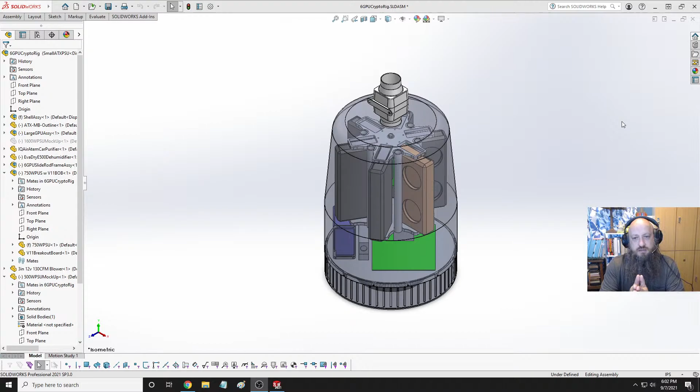Looking to get some things fixed that we noticed. And I'm going to look at where I picked up the information for these rods, because they're just so huge. They're so freaking huge. I don't like them. So I think I'm going to, because I believe I can go with probably 1/4 inch solid steel rods, and that'd make it a lot better.

Plus, we're going to modify this to enclose the round so that it makes sense. And then the next part will be to definitely double check some clearances as well. And hopefully get the rest of the brackets that I'm going to need for some of these things. I know a pretty easy one to do will be the one to mount the exhaust fan.

And let me make sure chat should be available. I don't see any. What the heck is going on here? Oh well.

Anyway, so that's the goal for tonight. Try and get as much of this finalized as possible. I know we definitely need to get the motherboard spacing, or at least the hole requirements for the various motherboards that could be put in here.

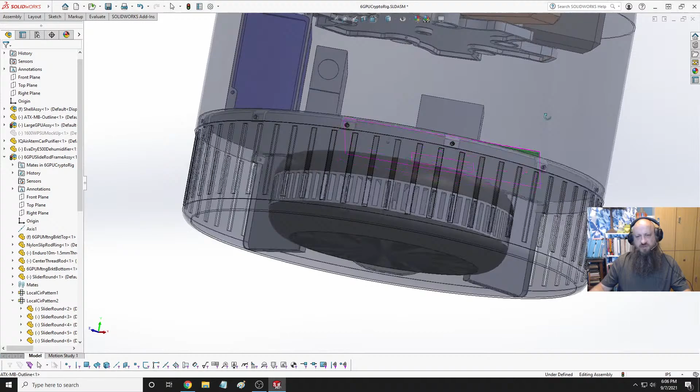The other thing I've considered was taking out the adjustment factor, because that's just adding a lot of complexity to the project. That's really not necessary. It's kind of like a cool thing, but I guess I could leave it in there. I still have to address the issue, if I am going to do it, of how this is going to mount so that everything moves up and down like it's supposed to. Which is going to be different.

Why is my chat not showing up? Okay, there it is. I actually have it popped out so I can keep track. Yeah, that's better. I like that a little bit better. That way I can keep all my stuff on monitors, and I can keep track of chat and not miss something anybody says.

So, alright, let's look at these slider rods. Bring this over. And honestly, I can do whatever size I want. You know, I may just do that. Because it'd be pretty easy to get a hold of a round of like 1/2 inch or 1/4 inch stainless or even aluminum if I chose to do it that way. It'd be just a custom, and then I can adjust the slider brackets to match what I need. So maybe we'll just do that.

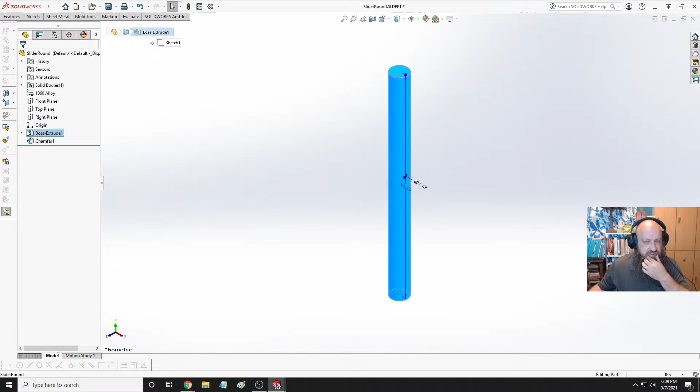We'll modify this a little bit to make it something that makes sense, because these are just huge. I'm not a big fan of how big they turned out, so we don't need this, so we'll just go ahead and modify this. Yes, go away. Yeah, that's over an inch. That's just ridiculously large. And since I have 6 of them, I don't need them to be that big. So let's go with a 1/4 inch diameter. You know what? I say that and then I want to change my mind. We'll go 3/8.

And we have that as 1060 alloy. I think that is the... Yeah, that's an aluminum alloy, so that's fine. And then we will have it chamfered top and bottom. So save that, and then we will make sure to grab, whoops, maybe. Will it let me grab it? Yes, it will. Let's open that up.

Let's get rid of that. That'll cause an error on the... well, maybe not. Okay. Edit the sketch on that bad boy. And we'll make this, let's see, 375. I'm going to do 0.390 for that. And 0.39 plus 0.5. That's pretty thick. I don't think it needs to be that thick. 0.390 plus 0.375. How about that? Yeah, that looks a little bit more balanced.

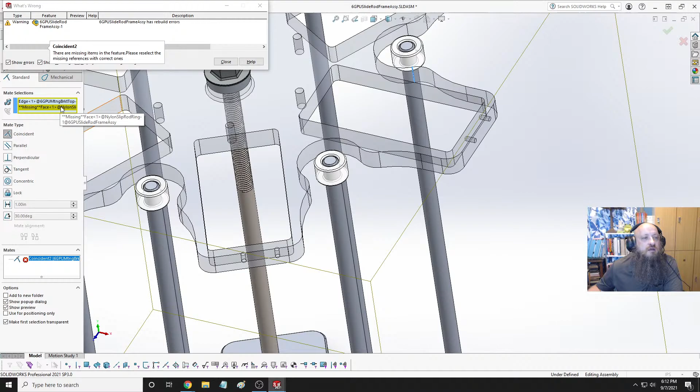Okay, because I had the flat tied to that tangent point. That's why it was doing that. Okay. Right now they'll just spin in place, which is fine. That doesn't bother me. Alright, now I need to look and see what that was again. I think it was 0.765. Yeah, 0.765. So what these need to be is the exact same size.

And those nylon pieces will be press fit, just like you would a ball bearing around a shaft or inside of a hole. You just put it on a...

Oh, Annie. My cat likes to jump up and down off my computer. And in fact, I have to put a little thing right over the power button, because she stepped on my power button before. I'll just be in the middle of doing something, and all of a sudden my computer's off, and it's like, what the hell just happened? Oh, the cat jumped on your deal. It's like, good grief. Okay.

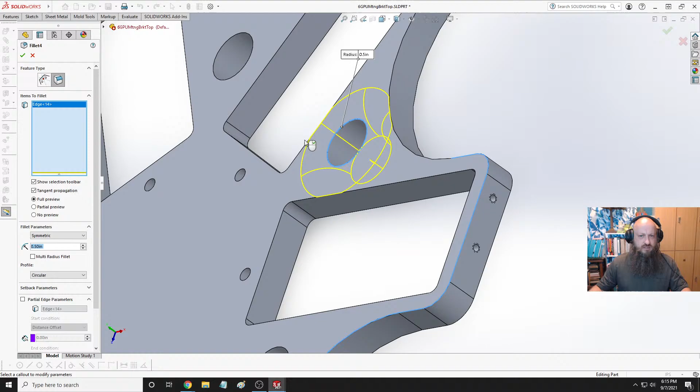Those were around. Alright, we'll just get rid of that then. No, because I didn't see what the size was. What do we got? Half inch. Let's just remove all that. Clear all missing references. And I think I used it for these. Nope, that's too big. Okay. I'm not entirely sure what I used those for. That seems to be ridiculously small. We'll just delete it.

And I chamfered that for the central arm. And honestly, I should do the top two. No? What? Okay, what the hell's going on? There we go. And I should be able to do that with these as well. And just add those in. Gives it a centering type feature as well.

And those should be press fit into the, well, depending on, okay, so those rods will be basically, oh, that's what it is. Those rods need to be fastened to the bottom and slide through on the top so that when you turn the screw, all those rods move up and down. Well, the top plate will move up and down so the rods will look like they slide. Which means they need to be longer than... I'll have to look at that and make sure I design that right, because now I'm second guessing myself again. Alright.

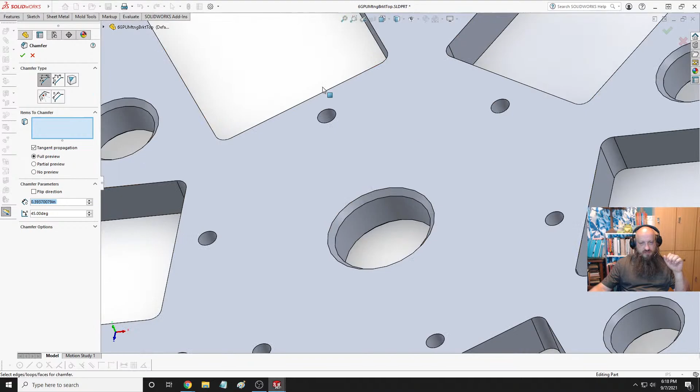Honestly, all of these need to have a chamfer in them too. Let's see. So, wait, where's all my... how come those aren't showing up? Oh. I don't know what I'm doing sometimes. Yep, that's what I want for these. Those are mounting holes, so they don't need to be on this side, but they need to be on the side opposite. Wait, I thought those were... they are threaded.

Alright. Wait a minute. Those don't need to be chamfered. That just needs to be a threaded through hole, because it's going up through that mounting bracket. Okay, that's fine.

That's a nice little curvy feature. Yeah, I think that looks a lot better.

Now, the only thing: I think I should have some grooves in here for airflow, but I don't want the airflow to bypass going through the GPUs first. I mean, I would like to have that, but I think that would actually hinder the amount of airflow that I want to go through there to make sure it goes around and through the fans of the GPU before it gets pulled out of the top. So that's why I haven't put them in there. I keep going back and forth on whether or not I want to do that. So, alright.

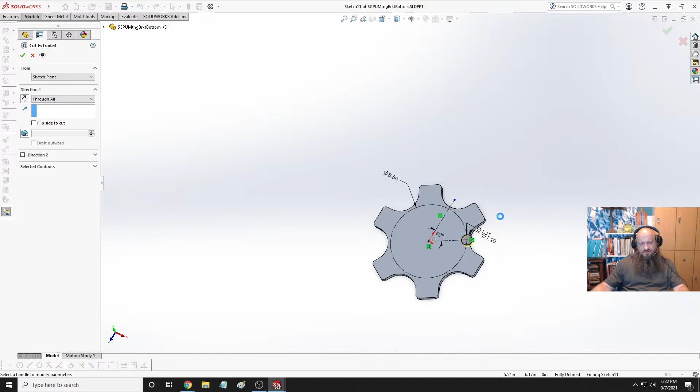Where is my... Hello? Why won't it let me select that? What the hell's going on? That needs to be 0.76. I'm gonna have to double check that. Alright, where is it? There it is. 0.765. I was close. Yeah, that should be press fit in.

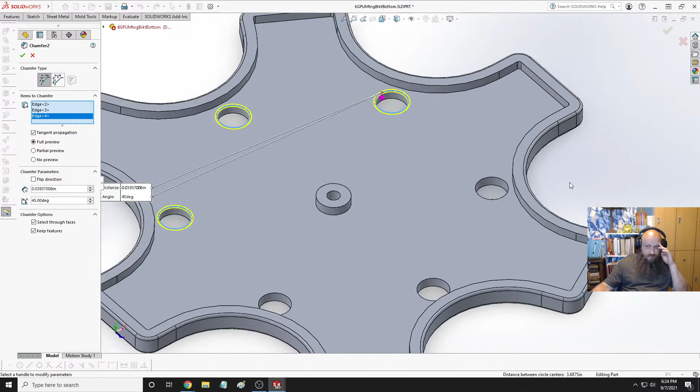Oh, good lord. Why is that so damn big? I don't understand why that's so freaking huge. Just makes no sense. This is annoying. What is this? .03, okay. It's so weird sometimes. Those are press fit. They should stay in place. There should be no reason why those will bump out.

Alright, where's this supposed to go? Clear missing references. I think that was to here and here. Yep. That's cleaned back up, and I don't need this anymore. Now, is that... It's also aluminum frame. Alright, let's see where we're at now. That's a little better.

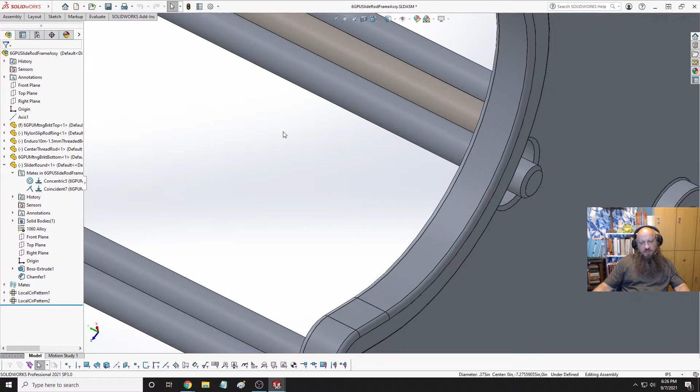Okay, what am I missing here? Okay, so those holes actually need to be smaller. And it needs to press fit into there. And that's the extent that I want it to be. Okay, so yeah, those holes need to be... I'll put 0.374 on those. That way those are press fit just nicely. Same with that's press fit.

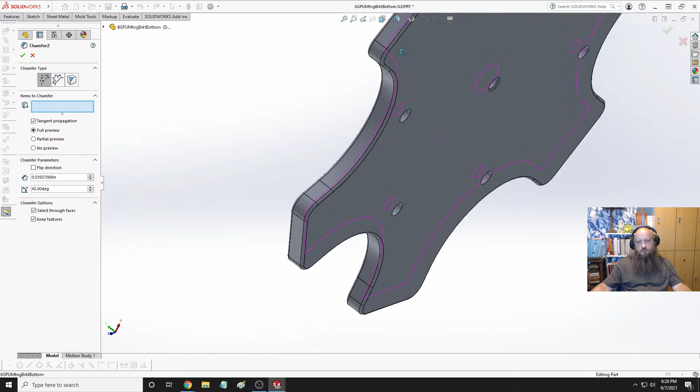Make sure I got the right orientation here. Oh, no, I didn't. I gotta flip those. Gotta flip all those. Okay. Let's try that again. That does not need to be chamfered. Sweet. That does. This doesn't. Get rid of that one. Oops. Yes, that dead ends into that. Okay, that's good. And then I need to change the chamfer on those other ones. Oh my goodness. Alright, good.

Got those little fixes done, and I'm still not sure it needs to be that damn thick. It's alright, we'll roll with it. Oh, wrong button. Wrong button again. There we go. That looks a little bit more believable.

And really, if those are going to be press fit, then I honestly don't need a chamfer on the bottom of the rod, and it doesn't need to extend past that. It just needs to be that distance so it's flush. So 0.2375 on the rod. Oh, I know why, because I had a thickness to that matched this. So honestly, I can make more of these. That would help with the press fitting, I think. Alright, we'll do that real quick. Probably don't need to do it that way.

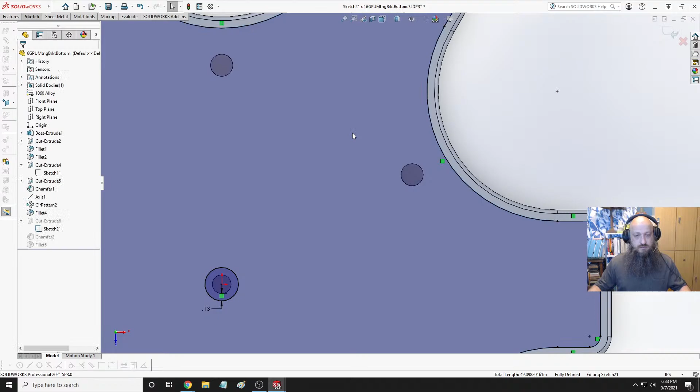We'll extrude that. Oh, wait a minute. No. Actually, I need to do it. That's what I need to do. Okay. All right. Let me delete that. Yep, I know what I did wrong. There we go. It's not what I asked for. Are you kidding me? So annoying.

Oh my goodness. Some things I just don't like about SolidWorks. This is one of them. Alright, that should be what I want. There we go. Then I can take this and apply it to all of those that I just did. Make it look that much prettier.

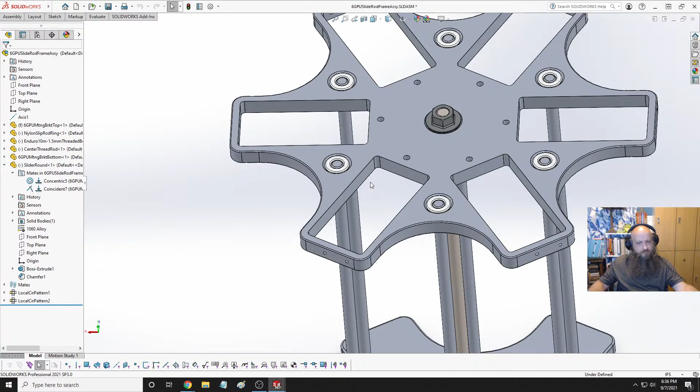Okay, now that looks right. All those pressed in, press fit, slide. I'll have to figure out what the rules are for the slide. It probably depends on the manufacturer and what their processes are. Oh, that's something else I don't need. I don't need those chamfers on this. At least it wouldn't be there. It would be on that bottom side, just to note where they can slip it in. So, same with that. Okay. So, let's see. Top side is going to be like that. Okay.

Yeah, all of these top ones go away because that's press fit. Oh, good lord. Press fit from the bottom. What in the ever loving hell? Alright, there we go. Press fit from the bottom, and then it's flush there. Mucho bettero. Alright, cool. Yep, that's the way it's supposed to be.

And this has that. That's that one that I found that was really cool. Bearing fitting. Alright, now let's see what we got in this main assembly here. That looks so much better. Alright, so we got airflow coming up into where these grooves are, in, and suction all the way around.

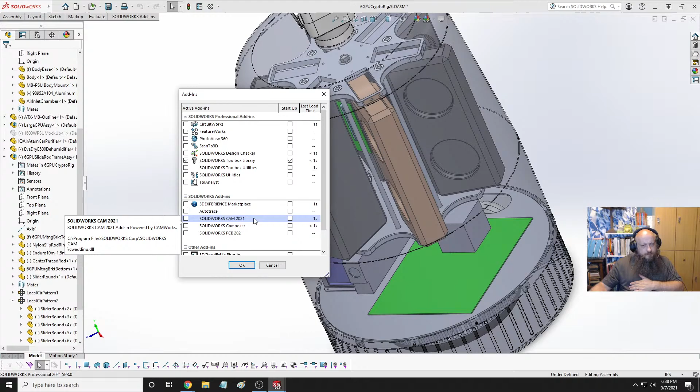I don't know if I have an airflow analysis on here or not. I don't know that I do. I think it's Flowworks or something like that. Yeah, don't look like I've got that, unfortunately. That was like an extra, what, $3,000 or $4,000 for the premium. So, not something I had laying around.

Alright, so, we've got, what the hell? Why is that not touching the ground? Alright, before we go on, I need to figure out how this is going to be mounted so it'll do what I want it to do. So right now, that is at the upper limit of its height, which I think I don't want to get any closer than, well, let's say there.

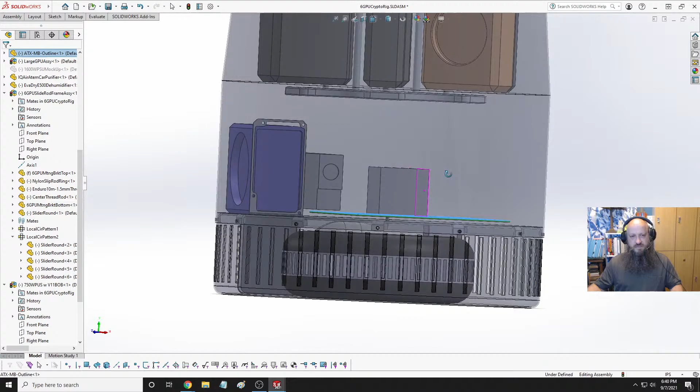So, thread allows me to go pretty far down. I can't go that far down, depending on the orientation of this. If these are down flat, then that can go down more, and I think that's what I initially designed it for. So, how can we improve this to make sure I get what I need out of it? Pardon me. And this will most likely have to be some sort of a clamping bracket to mount those vertical like that.

Alright. So that's the top. Honestly, those should be in a pocket then. So the rod doesn't push. No, the rod I'll have to push through when it goes down. I may have to get some of the components to play with it to see how it actually works. That way I know where to set up my two stop points so they don't get overdone. But I still need this to mount.

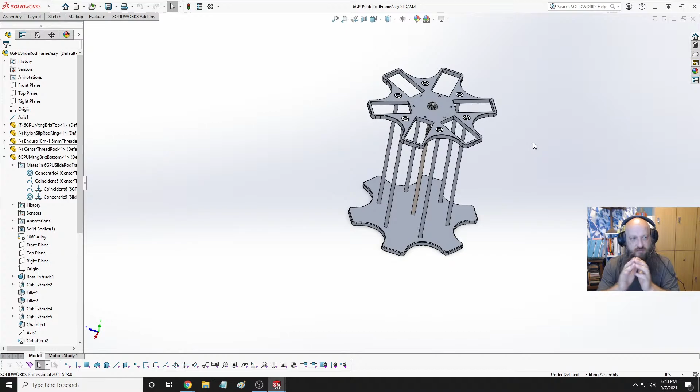Okay, so what I need to do, is this done? I have this locked down, but I don't need it to be locked down. What is this? Oh, I see. Okay. Center thread rod needs to move up and down. So that means all of these rods need to be locked down to the base, including the thread. It's locked on the top and locked on the bottom? What? Okay, what the hell? This needs to go away. Delete.

Okay, that needs to float, and the bottom needs to be the locking. So let's get rid of these. Delete. Whoops, where'd it go? That needs to fix in place. So, now these should all be, okay, where is the one that matters? There it is. Right. So this is press fit into here, and it locks to there. Now that should remain true for all these other ones, and this is press fit into that. Come on. And actually on that one I made it a shoulder. I could probably do the same thing in the other one.

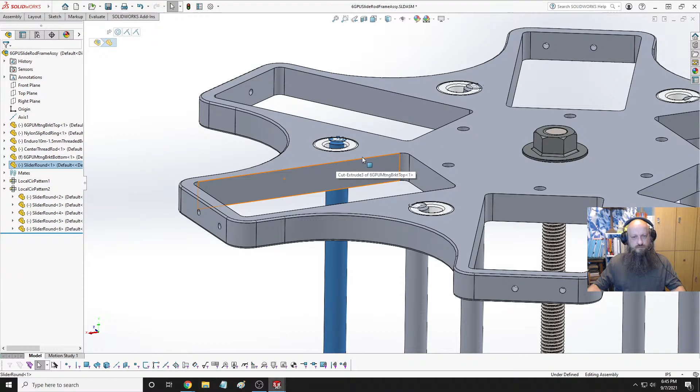Alright, so now I should... Okay. Oh, come on. Give me what I want. There we go. Okay. Now why is, I don't want that locked in place. Where is the other lock? That's for the nylon. Need to get rid of that one. There we go. Now, can I rearrange this? There we go. Now that makes a little bit better sense, and the application of it is as intended.

So I need a limit. I wonder, can I do a mating limit? I can't remember. Long time since I tried that. Let's see here. Let's try that. No. Advanced. What is this? I know it's a distance between two components. Oh yeah, because that has a. That's pretty close to what I'm looking for, but the way I've got it designed or modeled, it would try and rotate this whole thing.

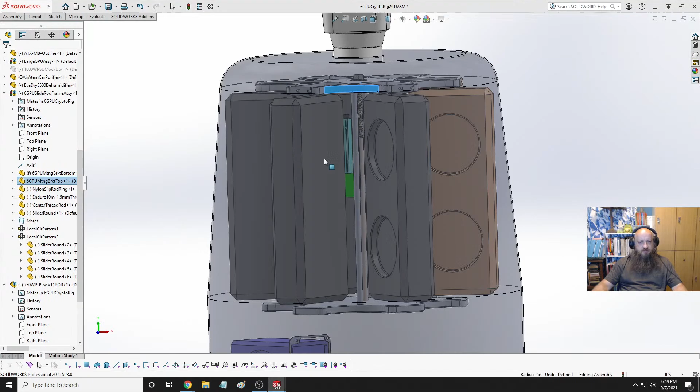So I need to find the upper limit. Okay, that's what I need to do. The upper limit here. And then I should be able to lock that in place and then still get the movement that I want here. That's my hope anyway. So let's do from here to, not the revolve. Come on. No. Alright, we're gonna have to do it the hard way. Pull it all the way out and probably isolate this and this.

Isolate. Basically all isolate does, it turns everything off except for what you just picked. So let's grab this and this, and we'll set a distance of 1 inch on that. And then we'll exit the isolate and see what that looks like here. Okay. I'm not sure if that's how that's supposed to mount. I'll have to find out. I might have to do a collar on this piece on the top of the dome. That way this slides over it and then you can use a hose clamp or something to snug it in. Because I don't think this is going to work right there.

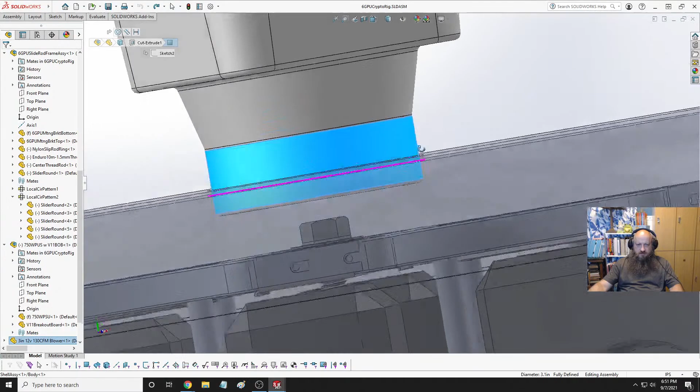So, whoops. Yeah, this subassembly, I can't move it. The only way I can move it is in here. So I can bring that down a little bit, see how it looks. Oh. Okay, I did something wrong. Well, did I put these in the wrong spot? Because if I move that up and down, then these crash. I mean, that's what I want to do, but this bottom plate is completely wrong. It's basically going to have to not have this cut out for the GPUs.

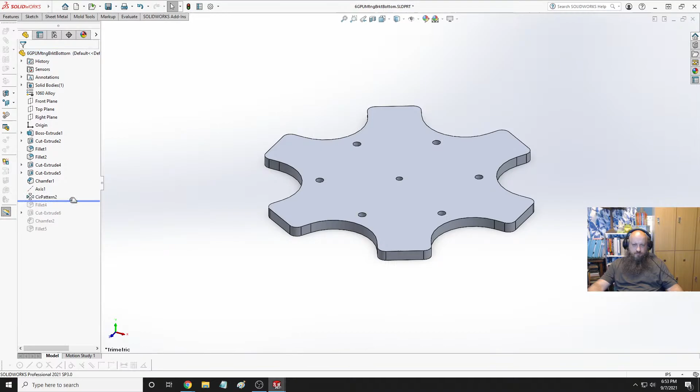So, this is going to be crazy. Boom. Because I designed it off of the other, it's going to blend that information. So I really need to focus or reconfigure this a bit here. So I need a distance from, where's it? There, right? Yes. To that flat there. We're looking at 3.512. 3.512, and then I need to look at the width there.

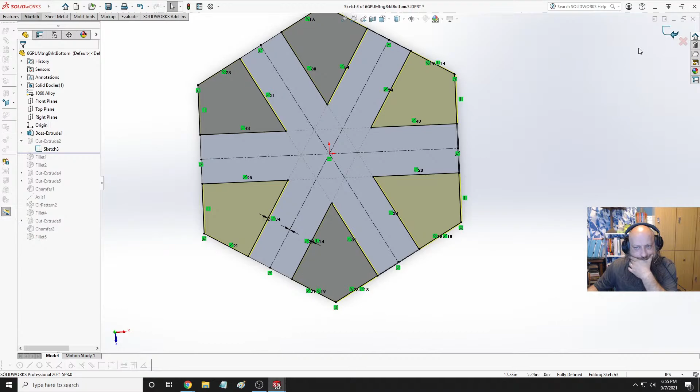Four. So let's look at this. Okay. What's the distance between here and here, I wonder? 2.5. Let's look at this again. Nope. What do I got here? I need these gone now. Might have to do it just as an after the fact fix. Then that would make these curve around. Well, let's just see what that looks like.

So let's do a sketch on there. We'll do an offset of this far edge. Let's do 3.625 to make sure we have plenty. And then the center line. Let's move this up here so it's out of my damn way. Then I want an offset. Whoops. Bidirectional 2.4. 2.4 total, so that's 1.2, and I need a little extra. 1.25 should do it.

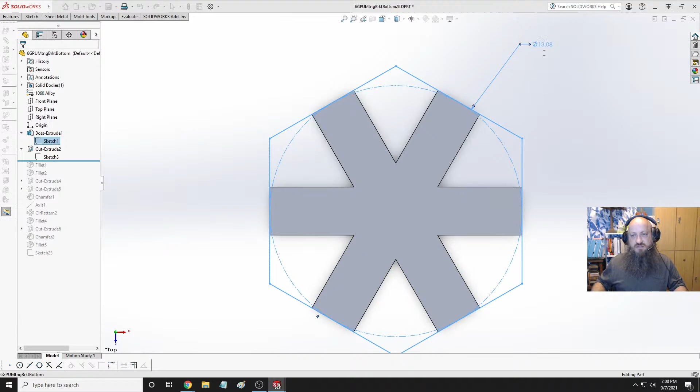So 13.08 is the tangent. So if I subtract my 3.625 off of that, that reduces that. And then if I do this, right, that's not going to be showing up because those parts are shorter. Boom. And then we do this. Wait a minute, something ain't right. That needs to be back. How come that I shortened? Something ain't right at all.

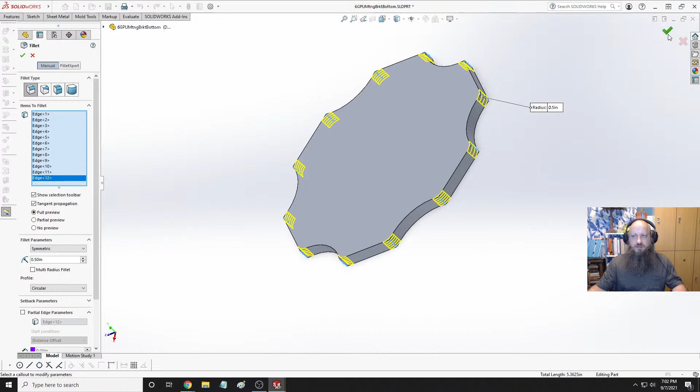Let's get rid of this. Oh, for fuck's sake. Yes, I know. Why is this all goofy? Oh, because that's not around. Okay, I'll have to fix that. Okay, so let's go ahead and put those back in and let it freak out. So I should be able to apply a fillet here. Let's see if that works. Oh, please select the piece that I want. Now, if I do that, there we go. Then that throws it in. Okay.

But I still, okay, what does that do for, all right, let's just see something here. Okay, and I still need that cut out then. Okay. Get rid of some of the issue there. So weird. How come this isn't making sense to me right now? Yeah, I still need to chunk that out. Alright, so I'm just going to have to do it that way. Which is fine. It's an easy fix. Actually, we can do it this way, make it even easier. No, I really want to do it the right way. Okay. Now I can chunk that out.

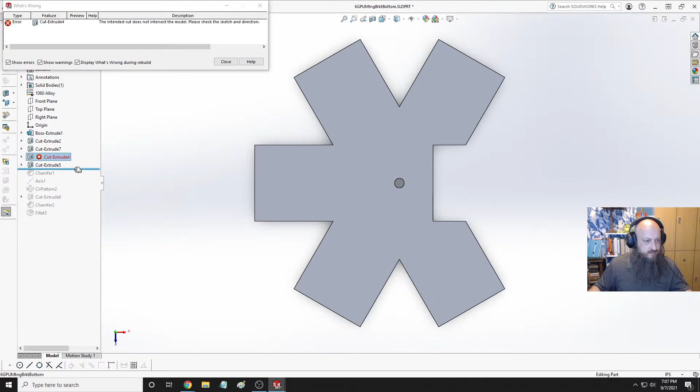Now, does that fit? It looks like that's exactly the size. Okay, that's dumb. Oh. And I'm almost wondering if I get rid of this, what it would look like. Trying to simplify. Oh, okay. Yeah. That's fine. We have not gotten there yet. So I need to move. That's that. I need to move this. Oh, for fuck's sake. Let's get rid of this. Move this up here. I don't care. Yes, that's fine. Then we're going to move that up there so it doesn't matter.

Alright. Now I'm going to take this. Can I do a circle array with that? What is this? I should be able to do that. Alright, let's try this again. Right. Yes, everything break. And I guess we'll just draw a bunch of boxes then. Can I do this? Axis between 2 points. Want it? I know, I don't care.

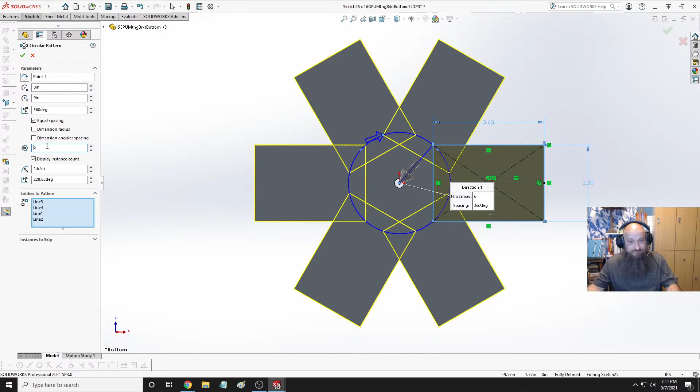But I want it 6. That means they're all going to overlap, and it's going to be a pain in the ass to cut all this out. Oh, this is annoying me. It shouldn't be this difficult. So, okay. So, how can I make this better? That's what I need to ask. What can I do to make this easier on myself? Because right now, this just isn't getting it.

This I don't need. Let's just get rid of everything and start over. How about that? Oh, shit. That's not what I wanted. God damn it. That's what I didn't want. Okay, delete that. Rid of this, because those are not helpful. Then, let's see how that works. Oops. Is that gonna work? So I need that. So that's all gonna go away. Oh boy.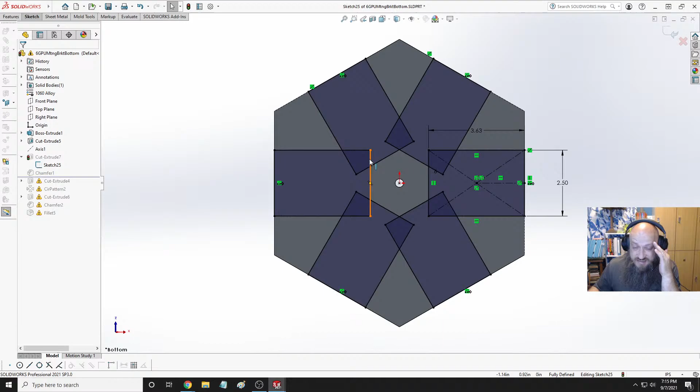Because I need that to go that deep. Oh my god, this is nuts. No, that's not right. Sorry, everybody. This is making me look really stupid. Okay, let's just see what it does. Now, so based on this, what this is saying is it's going to crash. That's just dumb because I know it doesn't. That's what's wrong. I've got the wrong dimension. That's what it was.

Do 1.75. And how come this dimension didn't ring true? Should all be the same size. 2.4 and I did 2.5. Why did it not? Nah. .75. That's much better. Now it makes sense. Good night, Nelly. Mm-hmm. Perfect. They don't touch. Yes. Well, we did that about the long way around, didn't we? Alright. Through all. Boom. Alright, there we go.

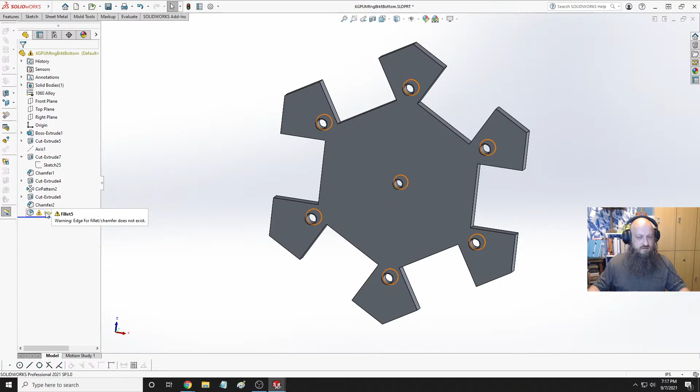Now, from here, that goes there. Alright, what do we got here? Be better if I could get... What's this for? Why is this not... What edges are missing? How's that edge missing? It's right fucking there. Okay, all of these, that's fine. Delete those for now. I don't like that. What's this? Should be enough. Alright, let's just see, make sure we have enough clearance.

Oh, they're not centered. That's right. I forgot about that. Because of the way that hangs in there. Oof. Okay, that's gonna be fun. So that needs to be off-centered too. Oh my goodness.

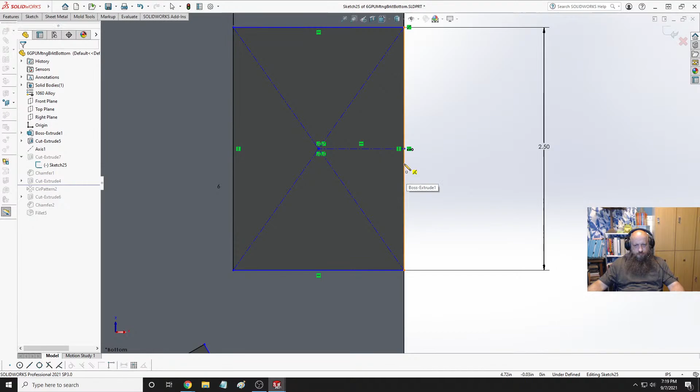Excuse me. I had a sneeze.

Alright, I think what I can do. Let's see what that does. Hopefully that's the right direction. Whoops. And it was not the right direction. Okay. Oh my god, stop. Wait, what? That's not what I asked for. Oh, it was a lot more of a gap than I thought. 0.1.

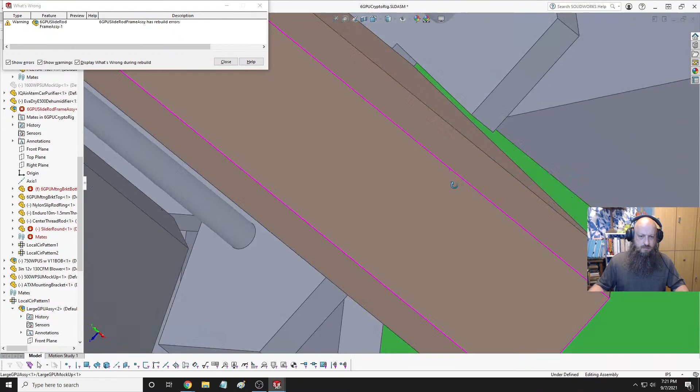Hello. What's going on? That's pretty good. Alright, let's see here. We'll get that. Oh my god, stop. Can you hear me? 0.06 on that side. That looks significantly smaller. 0.038. So if I go... Sure. That'd be fine. Another 0.12 maybe?

Are you gonna like add me your plan or something? I don't know. Honestly, I don't know. I'm rather new here, so...

Let's try that. Maybe that gives it a little bit more. Yeah, that's pretty good. We'll call that good for now. All right, now everything else is broke. Oh, stop. All right, what do we got here so far? Now I need to partify this a little bit. You know what sucks is these things I can't put a... Or maybe I can. Maybe I can put a little bit of a fillet in there. Or a chamfer to match. That's going to be tricky to do. We'll put a little bit of a fillet in there just so it has...

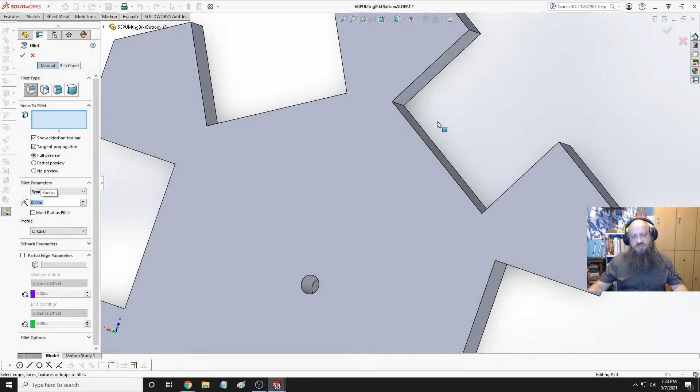Let's see what this looks like. Should help. Okay. Then we'll do the big one. Let's see what this looks like. Now, if I do this one, ugh, I don't know. That looks so funky. Yeah, whatever. Come on. Oh my God, stop. Can always change these later. Just have Mickey Mouse triplet ears is what we'll do. God, that looks so dumb.

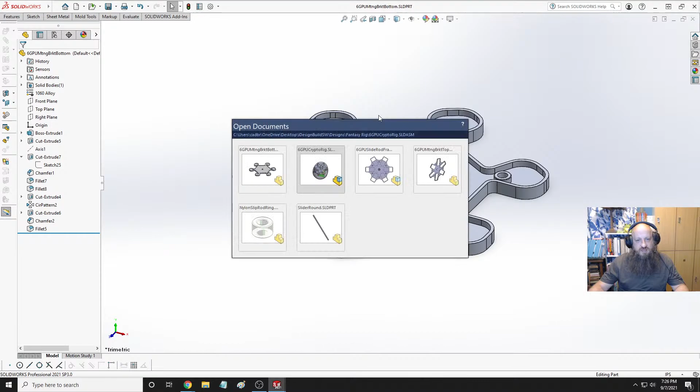What does this do now? Does it freak out? Nah, so far so good. They're not going to be able to do that. That's going to have to be a closed loop there. That's really thin. Yeah, I'll have to fix that. That'll be one of those minor details. Alright. Now, let's have this thing freak out again. There, that's what I want. Looks like everything is okay. The hell?

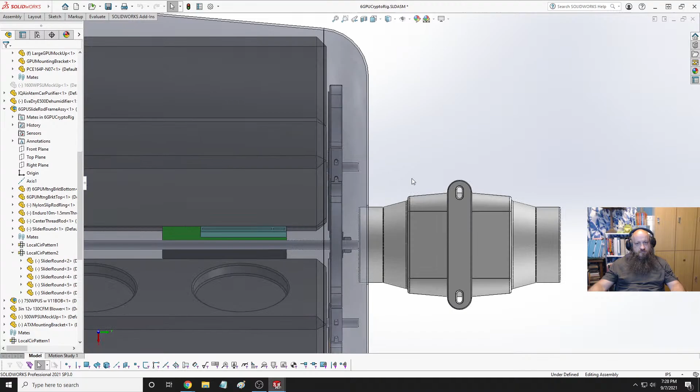Now, if I remember right, well, that works. We set this an inch down. Wait, is that right? Oh, yeah, okay, so I think I need an inch taller on that. What's that difference here? Seriously? How dumb. Yes, I want to measure those two. Oh my god, I hate this software program. Swear to God. Not all days, some days. It's just annoying.

Alright, let's look at this again. Distance from there to there, I made it 1 inch. Okay. So when I moved it, it moved everything up. Yep. So I gotta fix that as well. So I'll have to have that set below. Those extend. I'm gonna call it 1.25 inches. All right. So these are going to be plus 1.25. And I'm going to remove... it's going to be an inch down, and then I came up 1.25 inches. So I'm going to remove 1/4 of the material, and then back thread.

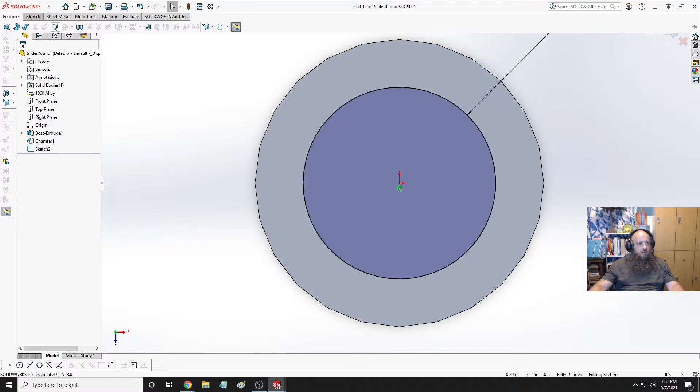Okay. Flip the side to cut. Then I'll make a thread here. Let's see, how did I do that last time? Features. Thread. That actually worked out pretty cool. Alright, thread location. Let's see, they want that. No, we want inch, whatever. Oh, Lord have mercy. 1/4-20. That's what I want. And that needs to be offset. Oops. Oh, there we go. Why did that? You dumbass.

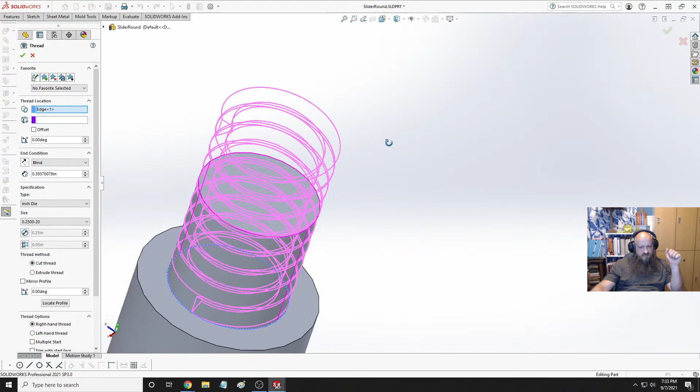Let's try this again. There we go. Inch die. Quarter-20. Cut thread. That's fine there. God, that's huge looking. That's a quarter-20. Oh, that's okay. Yeah, that's right. Very nice. Okay. Let's save that and see how that looks. Now, I'm going to have to reassign some of these numbers here. I'm going to put this at 0. 0 needs to be there. How can I fix that?

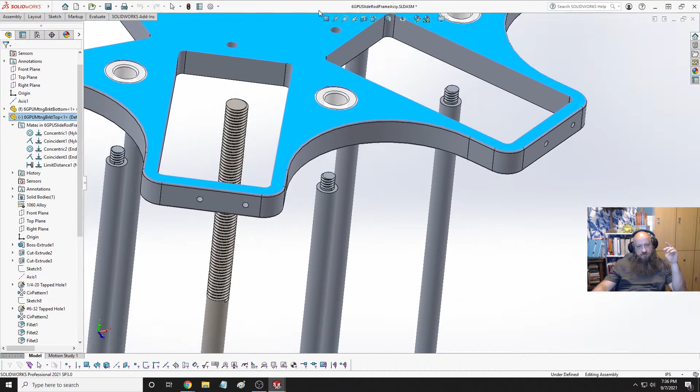I know. Oops, wait, where's this? Hello? Oh my god. Delete that one and select that. Wait a minute. Nope. I'm getting close. I know, because I added another inch. So that needs to be 1 to 4. What's this? Yes. What? What the fucking problem is? Now it's not broke. Oh, it doesn't work. Go figure. Okay, let's delete this and try again. Jesus Christ.

Here to here. No. Here to here. I want 1, 4. No, we'll go ahead and keep it 3. Why is it? Oh my god.

Lord have mercy. Now, when this thing slides down, okay, that took a hell of a lot longer than I thought. Yes, this is exactly what I wanted to see. Now, offset from that is going to be at a different angle. What is that angle? Those are...

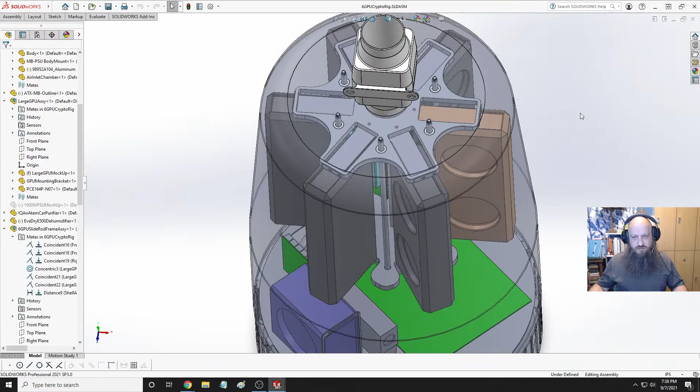Okay. Nope. It's open. Where's my open? Well, edit part's fine. Wait, what? That's not what I... Oh my god. Top. So... Top. First one should be 45.

Nope. I'm going to do a Hole Wizard. And we're going to make it a through hole. Quarter 20. There it is. Through all. Yeah, that's fine. Positions. Boom. Oh shit, I don't have the dimension. Was it 6.5? I think is where I put that at.

No, can't be 6.5. Oh, radius. Oh, we'll just make it arbitrary until I know where it's at. Just make it 7 for now, because I don't remember. And then this is going to get connected to there. And I believe that's going to be a 45.

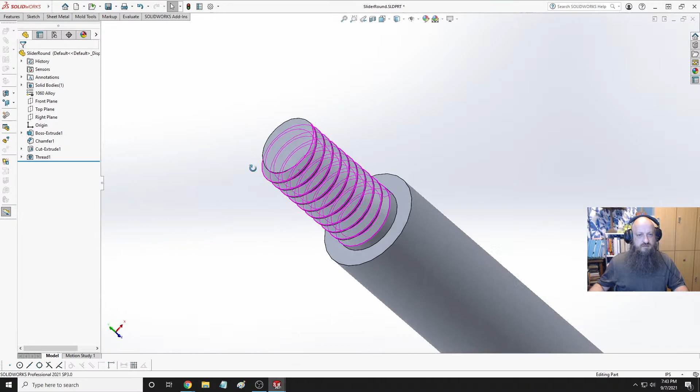Yeah, that's better. And then let's go ahead and use our toolbox. I don't know that I've done that very often in this one. ANSI Inch. We're gonna do some nuts. Do I want? I don't know if those come. I can do an acorn nut. High crown is fine. Oh, and the cool thing is we can drag and... Oh, there's no matching size.

Wait, what? Why is it doing that? Okay, that's not what it used to do. Okay, I was trying to go too fast. That's why. That's fine. No matching size. And I need that to be 1/4-20. And that's fine. 2, 3, 4, 5, 6. Oh, come on. Really? That's kind of dumb. Alright, we'll do it this way then. Aha! Now I know.

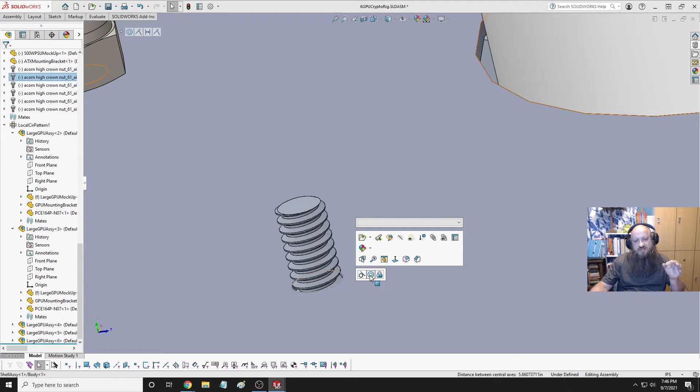Where it has a plastic washer. It's called basically a lock nut, and it's really hard to get started, but they have a plastic insert in the nut, and they seal around the thread itself. And basically, it's kind of like using Loctite without using Loctite. It's very nice, very nice.

Okay. Oh my goodness. Come on, come up here. Yeah, this is why I really don't like doing these in SolidWorks, because fasteners are so tedious. Man, you could have 1,000 fasteners in a project, and you literally have to go through and do this to every single one.

Now, when you use just regular rod and stuff, the reason it didn't attach it correctly, and I have to do this like this, is because I used that thread feature. That's more of a cosmetic cool thing, because people were actually making their own by making a spiral like a spring and then doing a cut extrude on the spring, but they would go into the Machinery's Handbook and get the exact cut profile, which is like a trapezoid, and that was the only way you could do it.

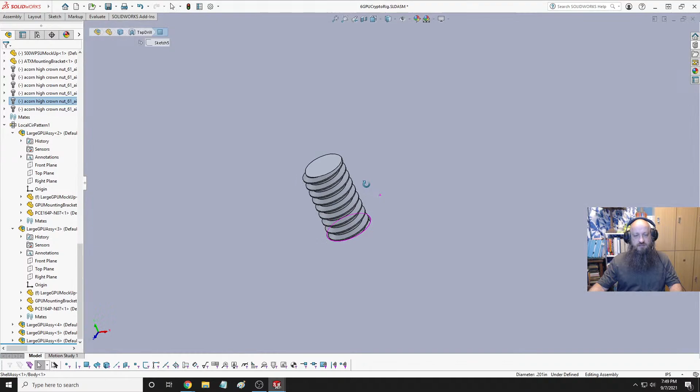All right. Now I can, whoops, change the transparency on that. And this does exactly what I want it to do now. We have it secured to the top. So, somebody wants to get in this thing, to remove these screws, they can pull the top off, take all the little plugs out, set it to the side, do whatever maintenance in here that needs to be done.

And then if they needed to access the GPUs, then they take out those 6 acorns, and basically it'll drop down. Yeah, maybe that's not such a good idea. Maybe we'll have to have a stand for it for assembly and disassembly. Alright, so now if I go over to my other sub-assembly, I should be able to pull this down. And the only thing you'll see is all the GPUs.

Whoops, so the mates, what's this? 1 inch. That's not right anymore, so we'll delete that. So the correct will be, you know what, I'm going to have to do this and this. Oh, thank you. Isolate them. I have no idea. I don't even know where I'm at. Then I need this to mate with the underside of this. Okay. Exit isolate. And there we go. There we go. That's what I wanted to see.

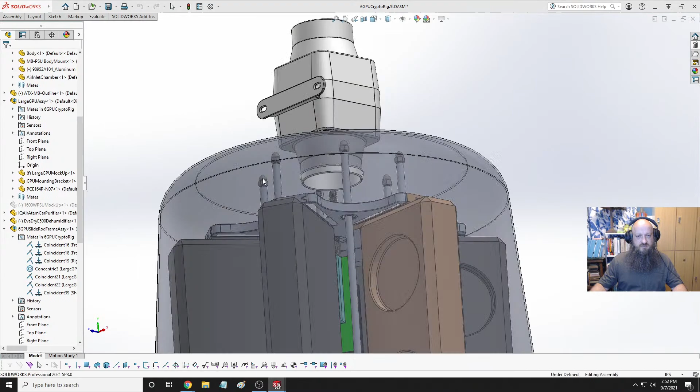Cool. So that's the max. Oh, actually, that worked out pretty goddamn good. And you know what? I'll turn this at a 45 so you can see the screw thread. So basically, you spin this and it goes up to a maximum of underneath that. I'll have to put like a stopper on here. I think what they used to do is basically just put a weld in there, like fill in those threads. So basically you can't thread or go any higher than where it wants to go.

And then for this, let's see. Basically, I'll just reduce the amount of thread that it can go so it stops like right there. But I mean, that's how it works. So that's modeled in such a way where I can, well, let's do it again. And we'll zoom in on this a little bit. And if I go back and we'll just go in between.

Say you need 1.5 inches extra clearance. Save that. And there it goes. It moves back up. And it looks like we have free clearance for all of these to go up and down. It's pretty nice. I think I like it.

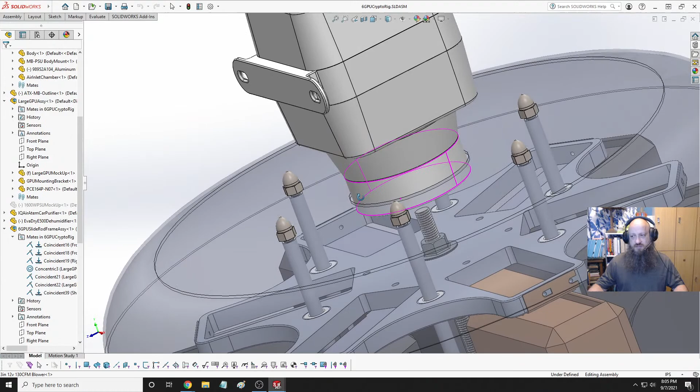Alright, back. Didn't realize how long it took me to get that other thing done, so let's see if we can knock some of this other stuff out pretty quickly. Nope, it's not what I wanted. I wanted this. So it looks like my mounting bracket for this bad boy, I can put one in there, but you know, I'm really not sure that this is how I want to do it. So I think what I'll do is I'll save that.

I really need to get the dimensions for those holes. Worst case scenario, I'll have to grab a piece of a computer that I took apart and drilled everything out so I could have a base plate for my test bench. And I can grab those and use my micrometer or my digital calipers and see if I can't grab the dimensions off that. But man, if I can go buy something that has them, then that's even better.

Let's see here. So now the only thing I'm kind of concerned about is that's going to be a lot of weight on these screws.

And with as thin of sheet metal that I have on this, it might just pull them right through. So that, of course, I won't know for sure until I test it, and then I can go from there. The other option is to extend these arms out to where they touch the base here, and then I have screws in here as well. That'll just make taking it apart that much more difficult, but

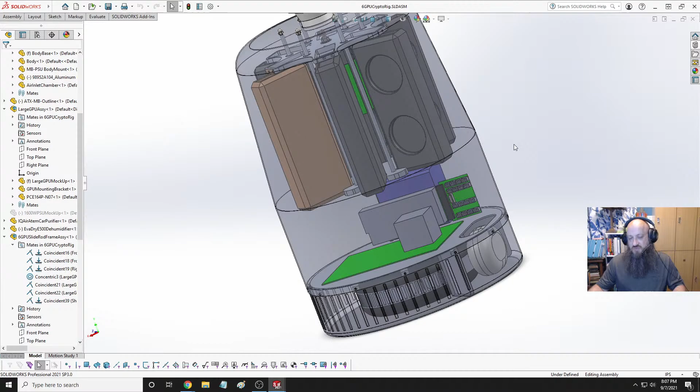What would be cool is if I could find a way to integrate a design to where all you have to do is just plug and play. That would be fun. But I don't know if that would be practical, because then I would have to have mounting for the risers. That would be interesting. Of course, if you turn that upside down and you have it all plugged in together and you just slide it in, snug it in.

You know, actually, that's not a bad idea, because all my wires will be running through that center, is to have some cutouts in this bottom plate to accommodate wires going through. Well, that's not what I meant to do. Yeah, I'll put those in right now, actually. I'm thinking like 1-inch holes might be okay. Because your 6-pin and your USBs are about yay big.

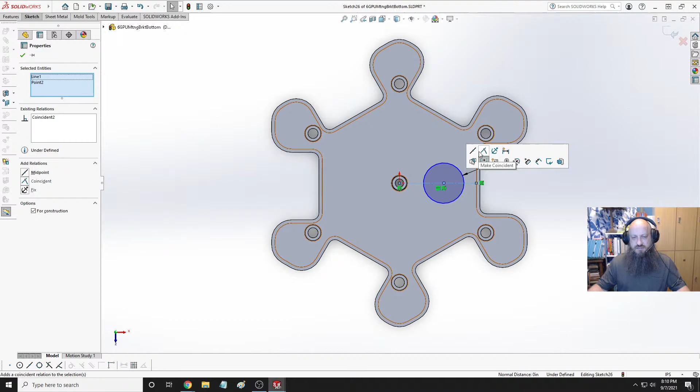You know what? We'll do this. Let's see, what did I get? Oh, wow, it did not work. Let's do 1.375. And we'll do that. Take that off of there. I want that centered. Well, wait, no. Okay, that's alright. Let's get that off of there. We'll put it right there. Wait, what? Why is it doing that? Swear to Bob. There we go. I want it to grab that. Still not doing it. Can I do that? Grab that. Oh, jeez. Okay, well, we'll just do it that way.

And I want to find out what the dimension between there and there is. 2.54. Whoops, hello. Yeah, 2.54. And then I can dimension from this edge to the center. And it still didn't grab that? Oh my goodness, why is it doing this? So freaking weird. We'll do that and divide that by 2. There. Now it's centered between the edge of this and the edge of that wall.

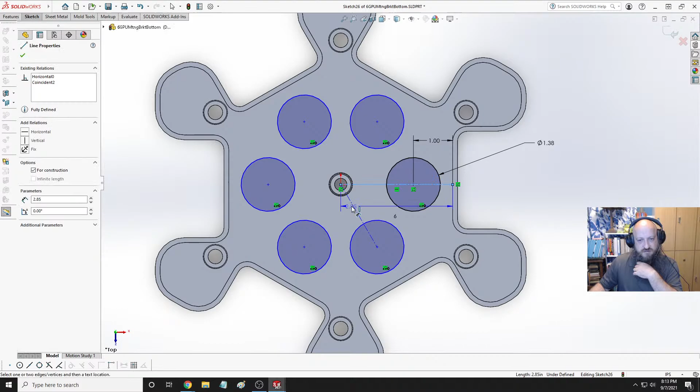And basically, those are just cutouts to... oh, whoops. No, I want that. That way I can dimension that angle, and it should lock the rest of those in place. What's going on here? So I have to dimension this too. There we go. And it, oh, oops. Grab that. Cut through. There we go. Plenty of room to run cables through. Plus, that'll give us a little bit of airflow through that part, but not the top part.

And let's do that. What's my chamfer? Yeah, we'll put chamfers on that as well to minimize the amount of cutting that it'll do. Just smooth that out just a little bit. There we go. That's nice and pretty. I really hate the way this looks. I'm just telling you, I may have to change this because I really don't like it.

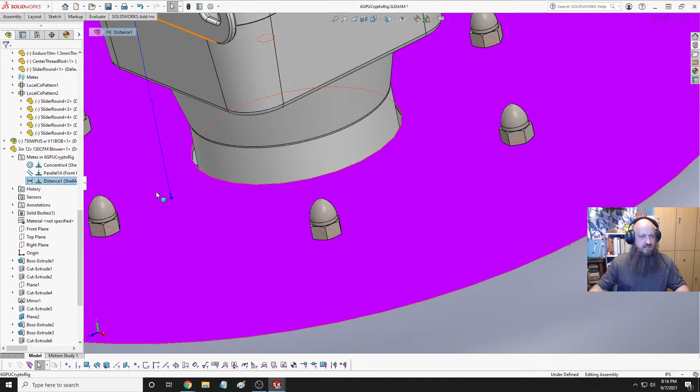So, let's see here. Let's turn that like that for now. And let's look at this. I think I want, let's see, that distance is 3.25. Let's go ahead and make it 4.

And then I believe this is the correct. Actually, I don't know that for sure. This could be an extruded, angled extruded, because usually for plastic molded parts, they'll have a 1 to 2 degree taper on them. So, let's see, how can we do this? Because I could eliminate a mounting bracket by basically making a sleeve where they clamp it, its own mounting bracket. And that would hold that in place and provide an airtight seal.

So, what's the dimension on that internal? I don't know that that's accurate though, but I think that's the way I would want to do it. Whoops, evaluate. 2.9. Yeah, I think I guesstimated that. So when I get this piece in, if I ever get to, then I'll be able to correct that dimension. But let's go ahead and put that in there. Oh, yeah, that's lovely.

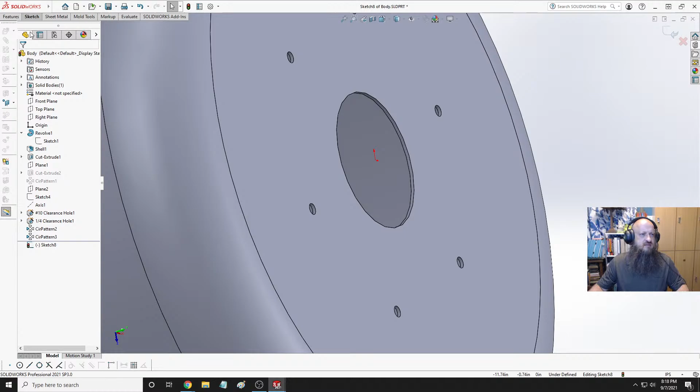Let's see here. We'll go ahead and do an extruded extrusion on this. What's my thickness? I think it was 0.1, but I'm not 100%. Oh, really? It won't let me grab. Oh, that's right, I used sheet metal. 0.078125, or sheet metal thickness. 0.078125. Alright, we'll do the same thing on that. And this might have to be a piece that's welded to it after the fact. Alright, let's, oh, I'm already in a sketch, right? Yes, okay.

Which means I'll have to close that out a little bit, shrink that hole. I want it to go to the inside of that hose, and that was 2.9. Alright, so get that in there first. It's going to be a 2.9. Right. Alright, so that means that needs to be 2.90 as well, so it matches. And then I can offset that hole, maybe 0.078125. I don't want it bidirectional. I want it to the outside.

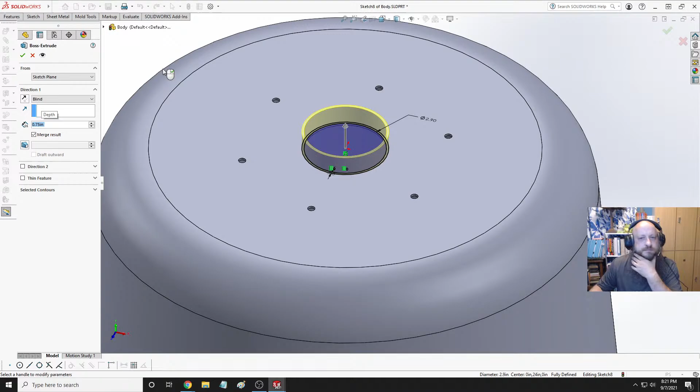And then I want to extrude that up like a ½ inch, I think it was. Whoops. Let's do 0.75. Because I think the hose clamps, I think those are about a ½ inch thick. There's that. And I want to give this a radius, internal radius here. So we'll go ahead and do a fillet. I said a fillet. Thank you. I appreciate that. 2.5. Let's see how that looks.

And then I'll need to do an opposite hand fillet of 0.25 plus the thickness that I just did of the material, plus 0.078125 just for symmetry. There we go. And I would like to have, we'll do a, whoops, a fillet on here and just make it 0.3125. Yep, just like that. There, that looks pretty nice.

So if we cut this, section it basically, and that's the profile you'll get. Oh, wait a minute, that ain't right. Oh, I have to do 0.125 minus. So maybe I'll switch those two fillets around there. Let's do, that's the big one. I actually want to, oops, copy that one. And then I want to change this one to the big one.

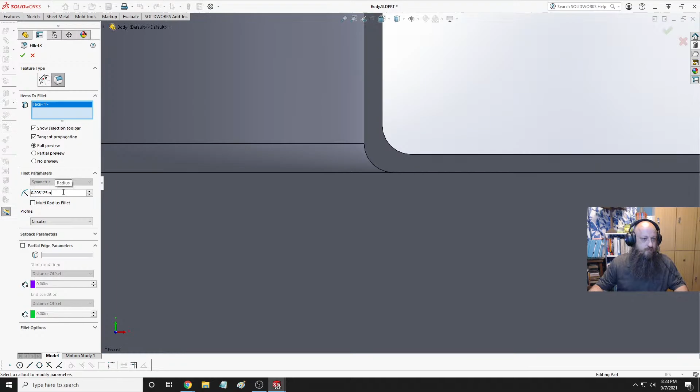Huh? What? Oh boy, what the hell just happened here? Oh, that's what happened. I clicked the wrong one. There we go. Now that looks like it's supposed to be like that. Oh my goodness. Okay, that's better. Now, if I ever decide to change the thickness of this, then I'll have to change those as well.

Yeah, that looks nice. We can take the section off. Give that a whirl. I don't know, those might be too close to the edge. Alright. Let's see what this looks like now. How much of that is going up in there? That looks pretty substantial. That looks good. Alright, I'm going to leave it like that, and that'll be my mounting. Yeah, yeah, I like it.

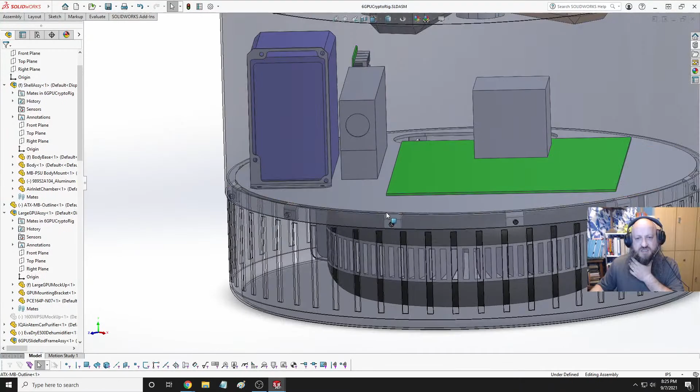I'm still not sure. The reason I'm reluctant to get more bracketing done is because I'm just not sure where I want this piece or how I would even attach it, because there are several different kinds of these server power supply units, and really the only way to mount them that I've seen, and I think I said this before, is basically sandwich it between two pieces of angle iron.

What I could do is have a slot in here with two angle iron. That way, if the thicknesses vary a little bit, you can just loosen those and they'll slide in and out.

And but then you can still clamp it. Basically, use pressure and clamp it down. Why is this not glued down here? Can I do that, or is it locked? Cancel that. Okay, what's going on here?

Why do I have that as a distance elevated? Oh, because of that. I see. And that is true, those do overhang. So if I mount it like that, then I'll basically have to have a little more complex mounting system. There'll have to be a ledge for it to rest on with flared out ends, and then so you can do a slide on it.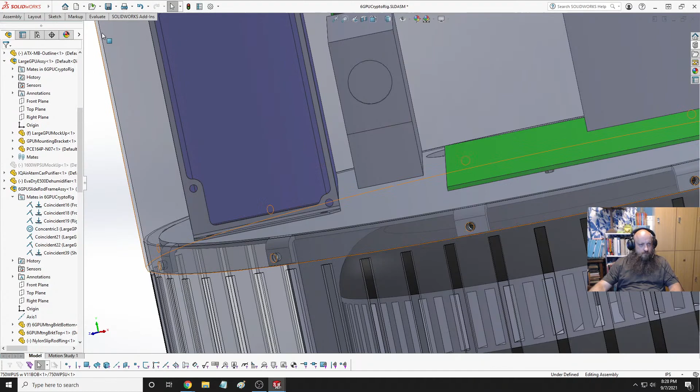Make a new part. And go with a front plane here. Whoops, sketch. We'll go. Boom, boom, boom. That would be the rest, where it rests on. And then we have to have, see, that's not going to work, because I've got to have another ledge.

I could do like an extruded crazy looking channel, something like that. Where it would be kind of like a modified C channel. And that would have to, because I don't think they could bend something like that. That would have to be an extruded piece. And those can get pretty expensive. We'll go with it.

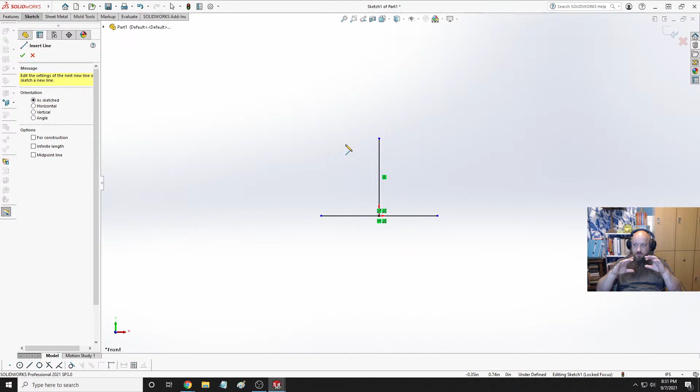Unless, oh, I could do that. You know what? I can make it like, oh, whoops. Oh, two C channels back to back. So I don't know if they make that small. It'd be something I'd have to check out. This needs to be. Oops. There we go. Yes. Those are going to be the same width.

What do I want? Dimensions, that's what I want. So we're going to make that a 1/2 inch tall. And this is going to be, let's see, how do I want to do this? Those things are 1.5 inches wide. And I've got 1.5 inches. And if I get 1/4 inch by 1/4 inch channel, so if I go 2 inches on those, and then I'm going to have to do an extruded thin. Okay.

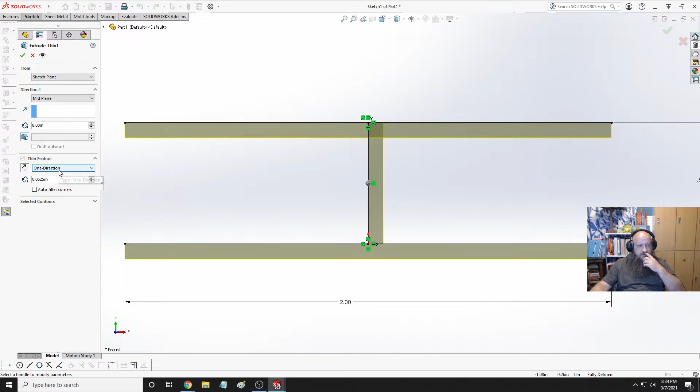Let's see. How can I, mid plane and 2 direction? 1 direction? Mid plane would be the way to do it. For Pete's sake. It's supposed to be one piece. I don't understand why it's doing that. I've never had it do that before. Oh well. We're gonna run with it. That is so weird. Let me do this. No, of course not. Alright, let's get rid of this because it's not going to let me do that. That's just really freaking dumb.

But what we can do is this. Change the geometry and we'll do a bidirectional offset of maybe, cap ends. Let's do lines. That seems really thick. That's a little bit better. What if I select the chain? No, that don't work. Let's not. Yeah, let's not. Oh, that's cool. Never used that before. Yeah, I'll put those in there myself.

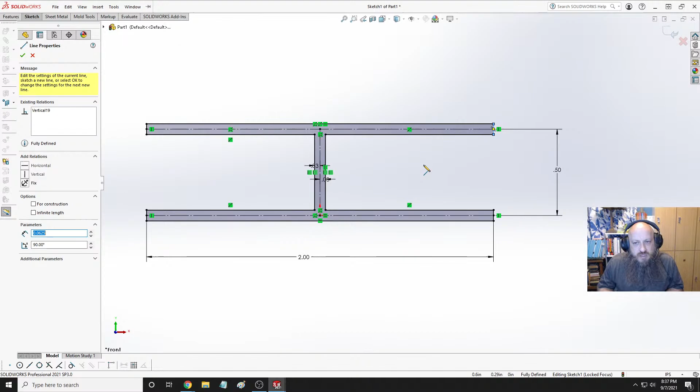Oops. Alright, let's trim these bad boys out. And then I'll add these lines back in. Normally the web, which is this part here, is usually thicker, but I'm pretty sure I could find something like this. Honestly, this wouldn't need to be that wide. Okay, I don't like this idea. I think a top hat design would be better. So let's go with the top hat design.

Center line, vertical, infinite length. These will be symmetric.

Oh, hello, here, little guy. Okay.

Overall, I want it to be, I think, 2 inches. No, that's what I want the top to be. Son of a bitch. No, no, no. Alright, this piece and this piece, those need to be symmetric as well. This will be 1.75. Yeah. No. Shit. 1.75 gives me an eighth of an inch for mounting holes, and that's just not going to work.

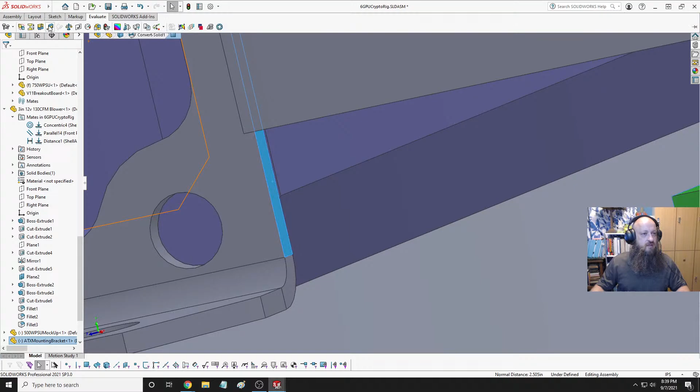I really need to know what that overall was, because I may have to steal some more. Oh, for Pete's sake. I better go to here because that's probably closer to what it's going to be. 2.5. Okay, 2.5. So I can go 0.25 here. And let's do 2 inches there. That'll give me an eighth of an inch, which I should be able to. I can reduce the material on that and make sure it's a punch.

Okay, and then I need it to be. I don't really need it to be the full length, but what is that dimension regardless? So I can do about half that. So all I need is it to mount on top and then be clamped in place. So let's do 3.5 inches on that. We'll make it 4. Oh, awesome. This. 5. Then we can do extruded line mid plane, doing 4 inches on that.

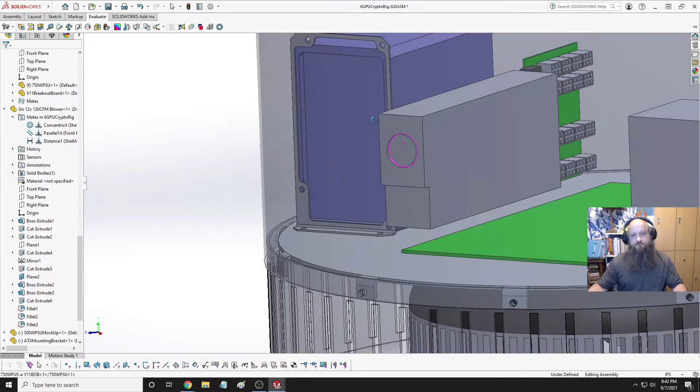Can we do just this done? And we're doing, that's pretty thick. It doesn't really need to be that thick. What was my, oh, that's even thicker than the, okay, so we'll leave it at that then. It's a little bit thicker than I thought it was going to be. We'll do, still like this, Jesus. All because I need it elevated. I'm not going to get very much room in there for screw holes and slots even. I'm going to have to come up with something else. Yeah, I don't like that at all, the way it's doing.

Goodness gracious. This is nuts. You know, I think what I might have to do is play around with the configuration and maybe even make it to where, it's just the size of everything in there is just so crazy. I really don't want to make this thing. This thing is actually a lot bigger than I already wanted it to be, but the amount of versatility that I'm trying to instill in this design is really pushing the limit of what can be done.

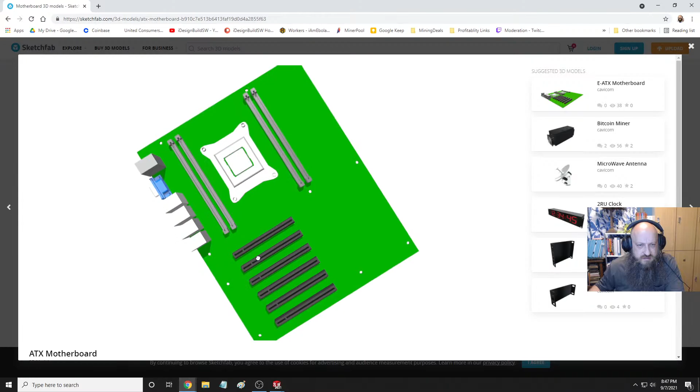And then there's an E-ATX motherboard. I don't know what that is. And I don't know if this one is. That actually looks pretty good. Doesn't have the cooler on it, but it looks like it does have pretty close to the correct hole pattern that I'm used to seeing. Then again, I don't know.

So, I couldn't have anything over this area or this area. Honestly, though, I could go. If I go from here to here, I could have. Well, actually, I could have this area covered with another board.

And if I go tall enough, because the cooling fan, sometimes they encroach in this area here, so it's like you have to rotate them just right. Some of those things can get kind of crazy nuts. Let's see here.

Yeah, I could actually do a platform off of this with some standoffs and have either a strap down clamp for it. You know, that might be the way to go. That might be the way to go. Can I? I really don't want that board though. And this looks like a damn.

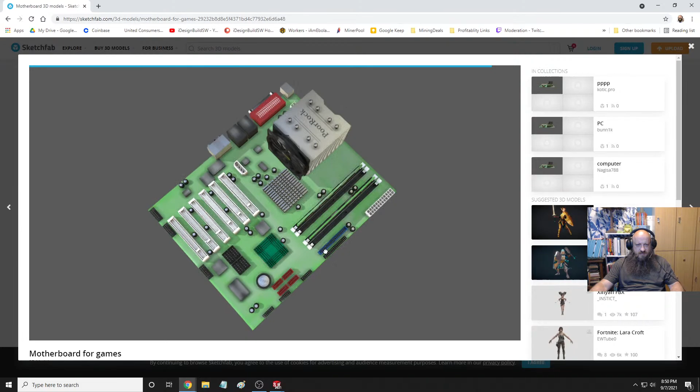There's no way that's not right. Did they really do all the tracing in here? Sure as hell looks like they did. Yeah, this has no mounting holes. Yeah, that's not gonna work. I think most of this stuff is for just looks. And that just looks like a scan.

That's something else that would be really helpful is if I had a 3D scanner. Yeah, this is a 3D scan that a lot of the information didn't get transferred over. Yeah, if I had a 3D scanner, I would just scan it in. That would make my life so much easier. I don't even know how much they are.

Alright, well, I think my next step then is to do some research and look at getting the actual holes in here, even if I have to, I don't know, I'll have to figure something out. And then that way I can decide whether or not I can throw, because the distance between those two holes, one's about here and one's about there,

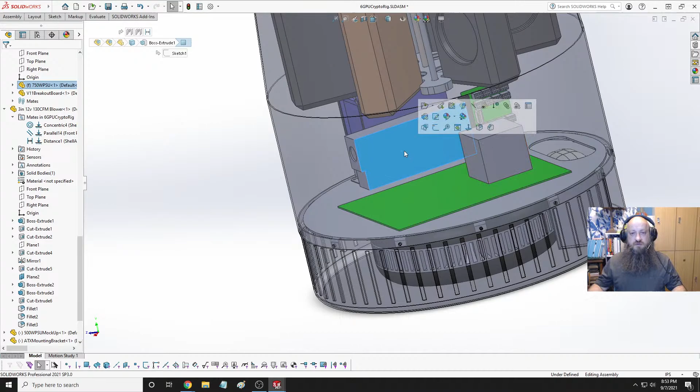But it'll be versatile enough to where the slot feature with those angle irons on that platform, just slide it in place, sandwich it down, and it'll be good to go. And if you needed to use like two of these, well, I take that back. Some of those cards are pretty power hungry. So either you would need a bigger version of this or two small ones like I have. But the versatility is such that you could do that.

You could stack these side by side, space enough to where the wires that go in and out have enough clearance to snap in and pull out. But there's a lot of gap there, honestly. Oops, let's try that again. And we'll pull down from here to where the cooler is. Come up about an inch or so, inch and a half with some standoffs. Mount another board, then you got your boxes that you can put on there, and that would be pretty marvelous, I think. Yeah, you can even stagger stack them, one left, one right.

All right, I think that's what I'm going to do. Save that for next week, because we are pushing. Pretty long session this time. So anyway, that's it for tonight. We'll see if we can't wrap this up with some of those follow-ups, get some of that information in there, and call this design to a point where it would be awaiting prototyping to correct any things that weren't caught in this initial design. So we'll see what happens and